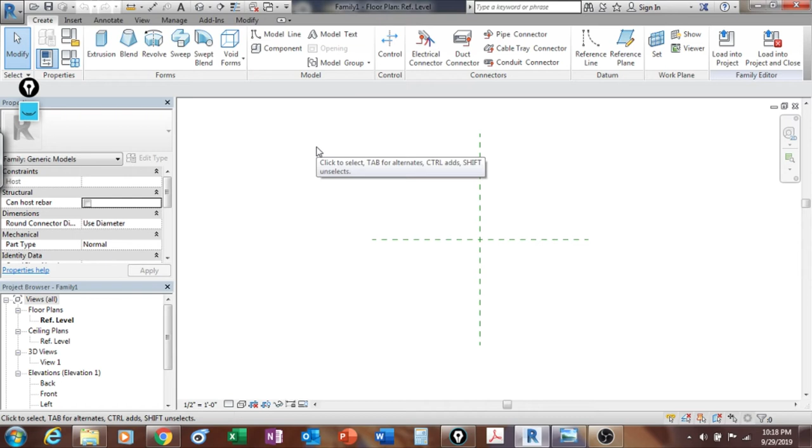Right here, open, I'm on the floor plan, and once I'm here, I'm going to create the reference line that I need. So first of all, change this to millimeters, so we work in millimeters. Here, and then I'm going to create a reference of 300 for back and forth.

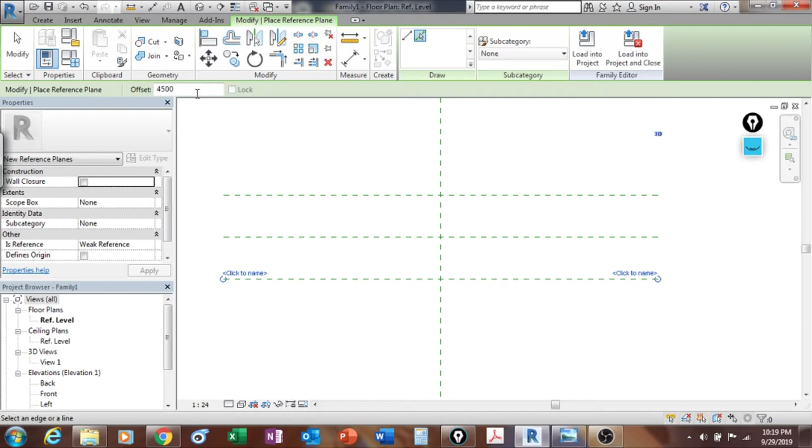Pick a line there. So this is also going to be, this we say is 900, right? So let's make this 400... 450, sorry. There, back and forth.

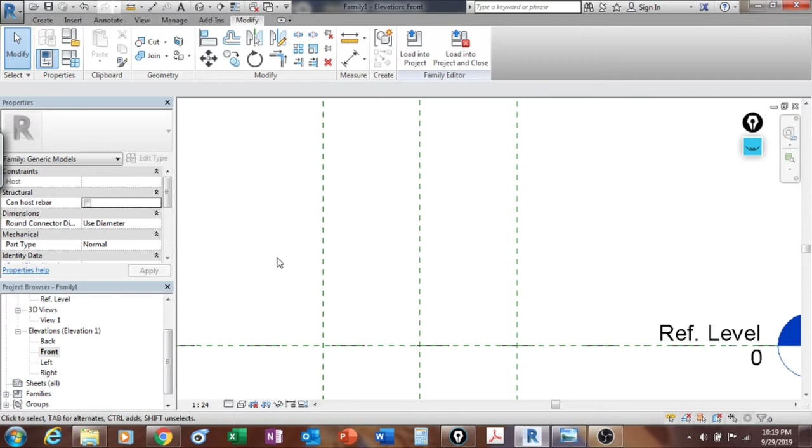Let's go to the front, and I'm going to make this 100 from the floor. There's two ways you can do this. You can put your family right here on the floor, or you can leave the 100. Now you have to have in mind, if you offset this 10, 100 millimeters, every time you bring this into your project, it will go 100 above the floor, and I think that's what we want right here.

This is always going to be this leg. We're gonna make it 100, and they're always going to be 100. This piece always gonna take legs. Okay.

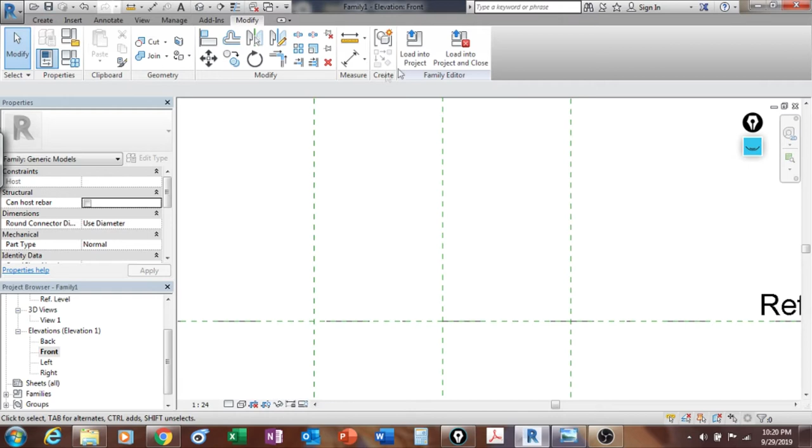So I'm going to offset this 100, so my box starts right at 100. So then when I compose my pieces, I don't have to bring it and shift it 100. Okay, so I'm gonna try to save some time in here. So right away, I'm going to create a reference plane. You can add an offset to it of 100. I'm gonna pick a line in here, and that's it.

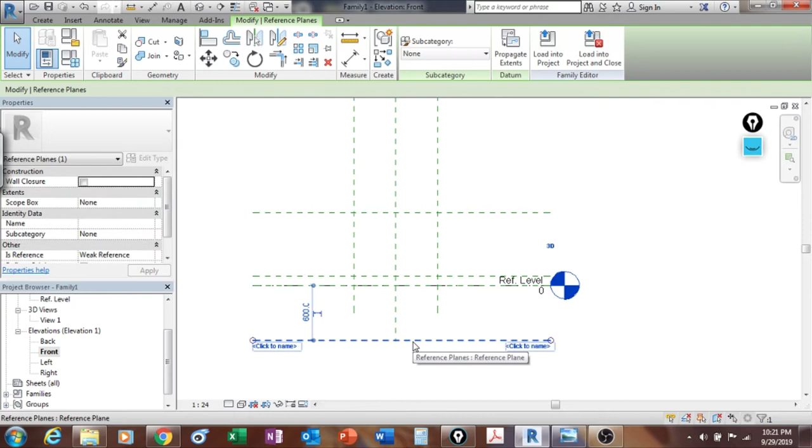And then the height is going to be 700. Pick a line again, and then that. This one actually not needed. You can put a name to it also.

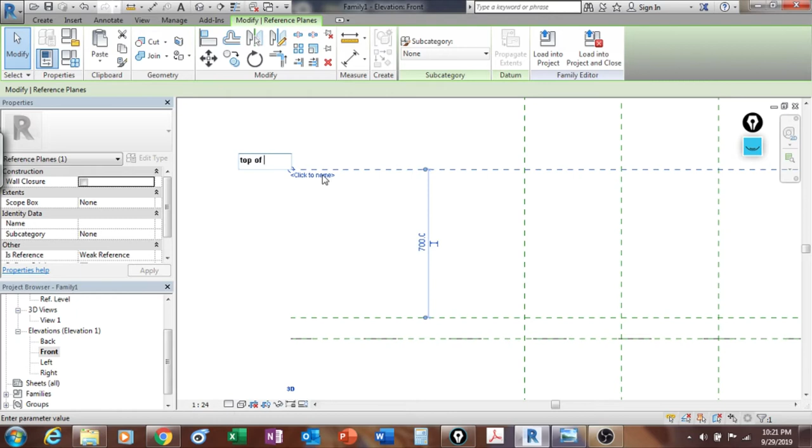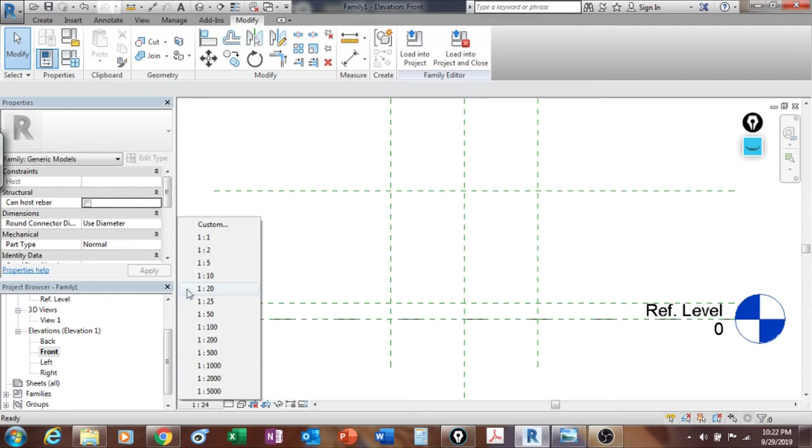This is kind of useful because in the future, if you're working, collaborating with other people, and somebody else needs to work on your families, they are not so lost when you get into the file, right? If you name things properly, you're gonna make it easy on the people that collaborate with you. You have to send this file to somebody else, they don't have to start guessing what is what, right? Even to yourself, sometimes you develop a family, and then a couple of months pass by, and then you go back to it and you start, oh, what is this? What is this for? What is this? You don't remember what it is, and you start trying to guess. So as much as possible, try to name things properly, so things go smoothly for yourself and for the people that collaborate with you. A Revit file might contain a lot of information, right? Sometimes it can be a little bit confusing, picking up some other people's files.

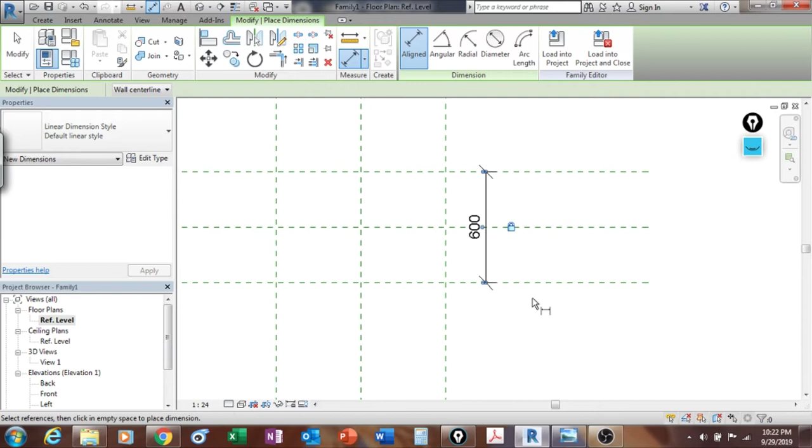Okay, so that's everything that I need in terms of the reference planes. Go back in here, I'm going to start creating my parameters. Now, the depth is not going to be a parameter. Click here, this is 600, and I'm going to lock this one because I don't want this to be anything else other than 600. That's that. Let's go to the front and do the same here.

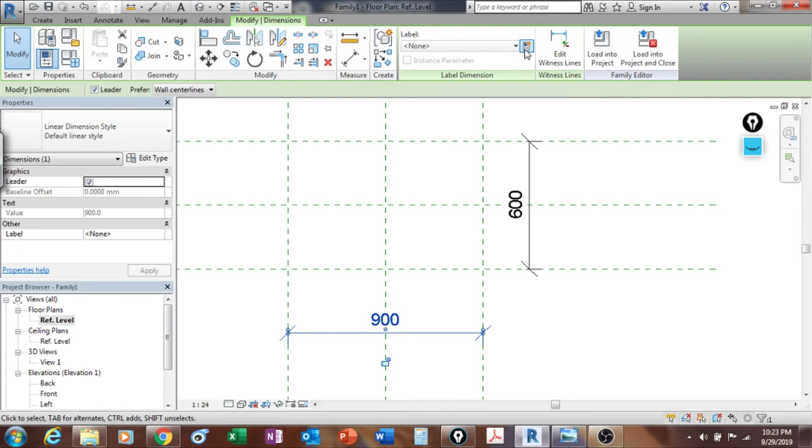This I want it to be, no matter what, 100. And this also I want it to be 700 no matter what. Okay, let's create this parameter right here, the one that is going to control the width. So create, it's 900.

Create parameter right here, label, not create parameter. It's a family parameter. It's going to be a type parameter because basically I'm going to have 3 or 4 types of width, right? That's why I'm going to have 900, maybe 600, maybe 450, maybe 1000. So it's going to be a type parameter because they're going to have fixed types, maybe 3 or 4. Name, I can call it width.

Going to be a little bit more specific since this is going to be a composition at the end of the day.

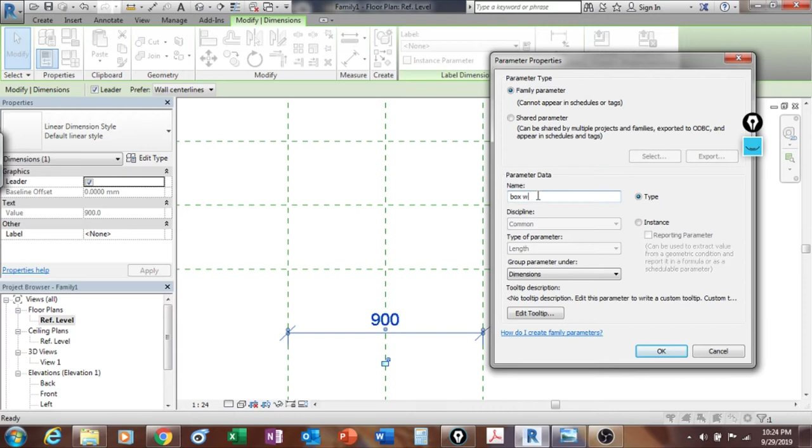As I mentioned earlier, it's very important for you to actually test everything, right? So I'm going to test this parameter and see if it works properly.

Okay, we have a problem here. Now the problem we have, and this is why you need to test everything, is that this went from 900 to 1500, but it did it in a way—it just grew in this direction only. Notice that it goes out of center. So even though it went to 1500, it didn't go just the way I wanted.

The way I wanted this to happen is for my family to grow in both directions, right? So for that, what I'm going to have to do is add something new here. I'm going to have to add what we call a constraint.

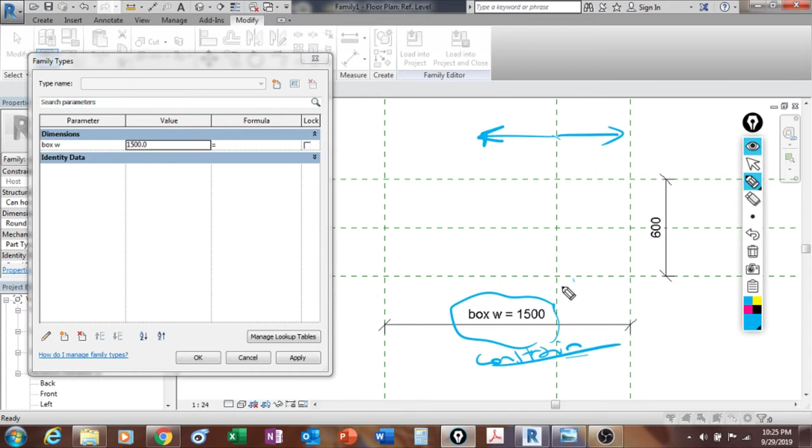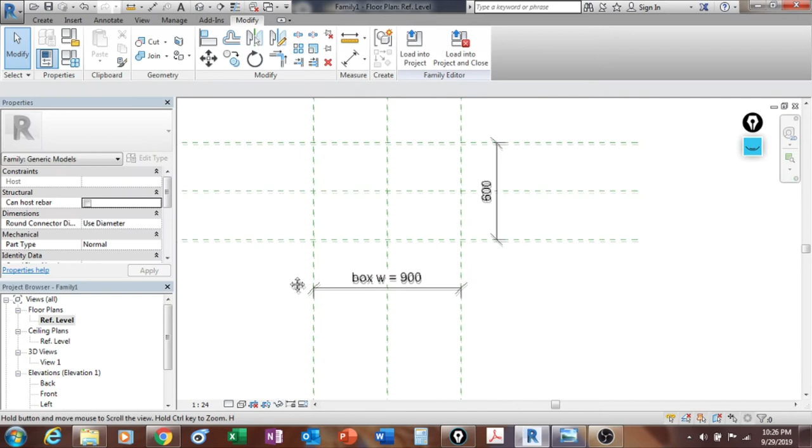Okay, so the constraint is going to be this: equal and equal. So my parameter is going to be constrained. Let's go here, 900, hit apply, go back to the center. So what we're going to do now is add constraints to the parameters.

Now one thing you have to remember, this is very important: you cannot add the constraint first and then the parameters, because it won't work. The way this works is that you first create a parameter and then constrain the parameter. The order is critical here, otherwise, believe me, it's not going to work. So let's add a constraint.

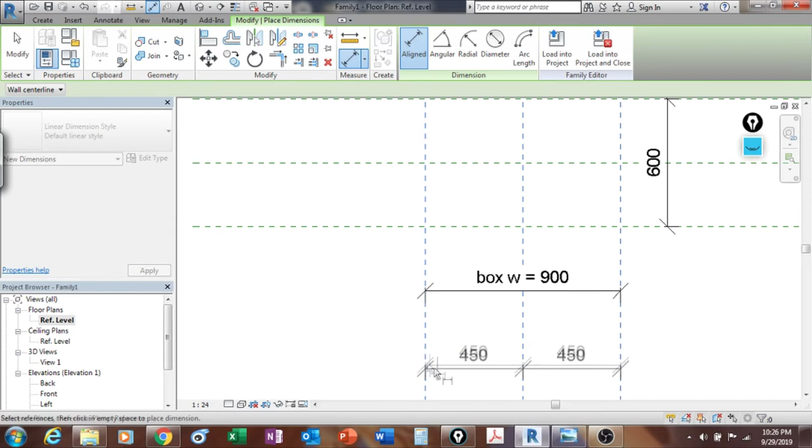It's quite simple. You make this dimension and then make it equal. So now this box width is constrained right here to be equal on both sides. No matter what happens to this dimension, it will grow equally to both sides.

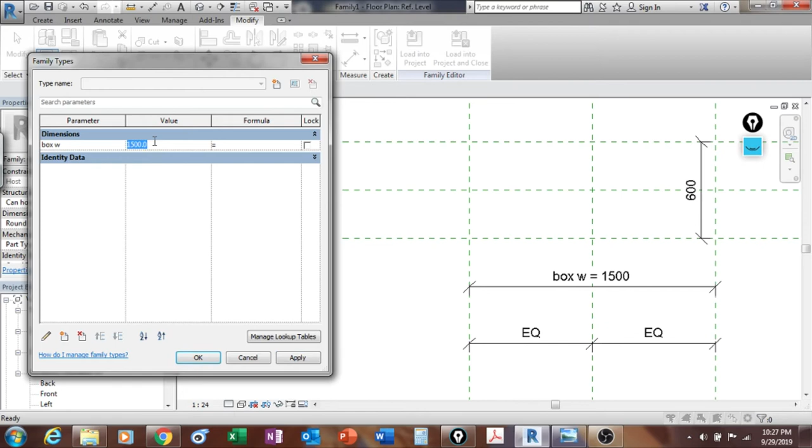But you don't have to believe me—let's try it. I cannot stress enough how important it is to test every single thing. So, apply, and just as we anticipated, it went both ways. Right now the width is 1500, and it's 750 and 750 on each side. So we're ready to continue. I cannot stress again enough the importance of testing everything you do.

Okay, so I think we don't need anything else for this box. Now we can proceed with the geometry. So let's go for it. I'm going to start from the top. I'm going to start from the front.

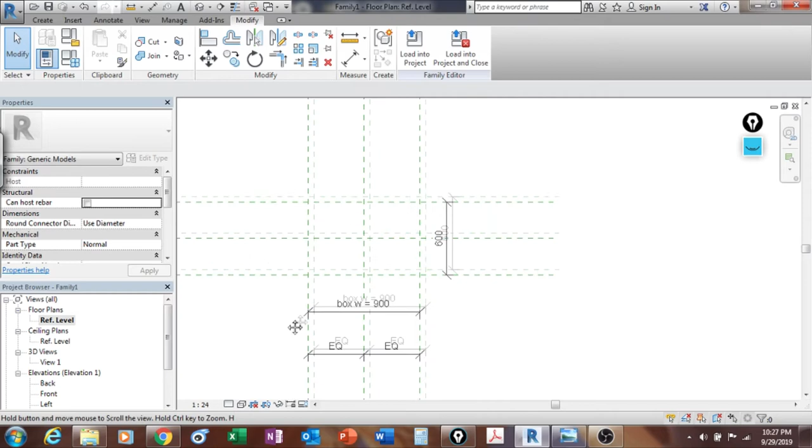Trying to see the best way to do this. I think I'm going to use... yes, I'm going to need some more reference planes.

Okay, so let's talk about the width of this thing. Let's make this 2 centimeters, right—20. So let me go here and create more references, and I'm going to make this 20.

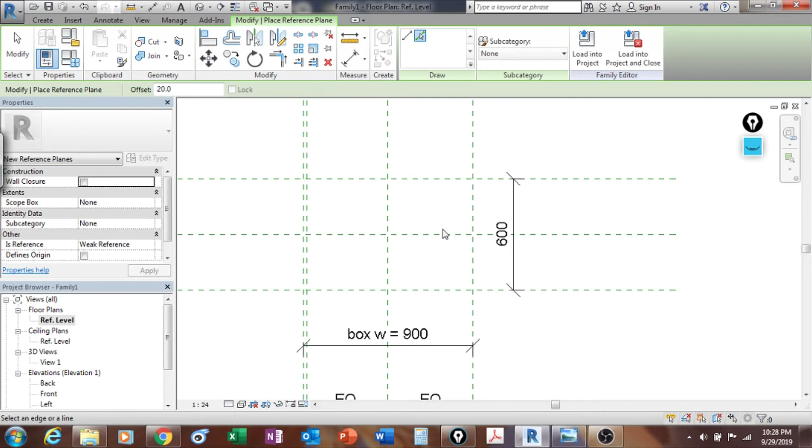Pick a line, I'm going to pick this, and I'm going to pick this, and I'm going to pick the back also. I'm going to pick the front. Yeah, so the offset there is 20, so it's set.

Now for this I need parameters—actually, I don't really need parameters, because this distance is always going to be 20 no matter what happens to my box. I want this to be 20, so it doesn't need to be a parameter, it doesn't need to be something I can change. So it's going to be enough to create a dimension here and lock the dimension.

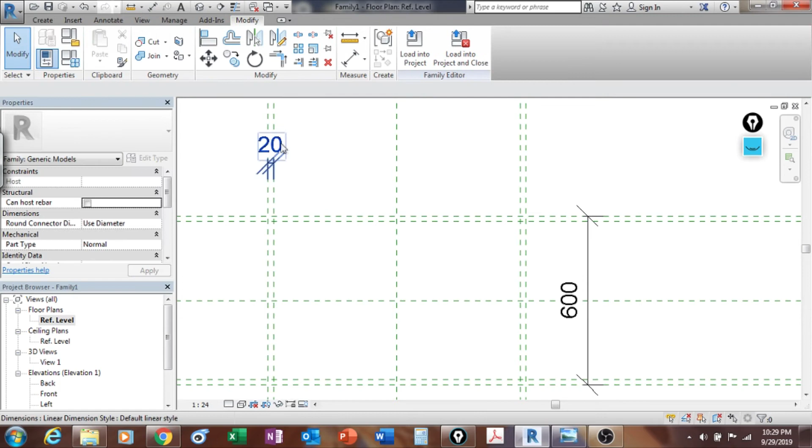You can move it outside. If you pick it from here, there's a little point, and you can move it outside. So now this dimension is locked, meaning it's not going to go anywhere. Pick there, lock this thing, and I'll take this outside.

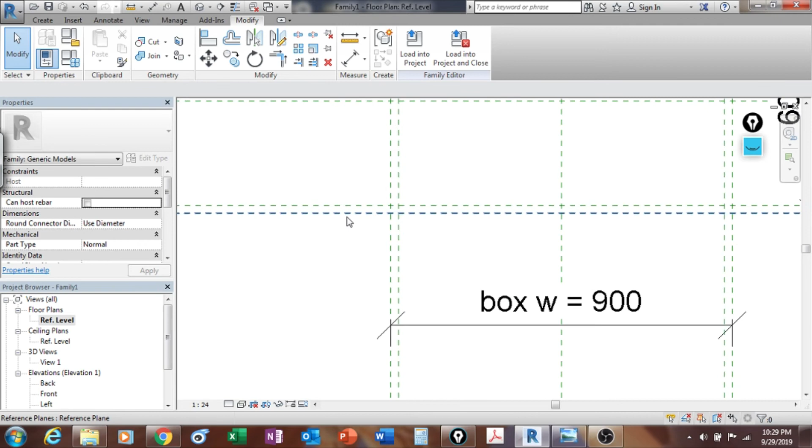Okay, so I'm going to do the same thing here—give it a 20, make sure it is locked, and move it outside. So I need one more here, right? Isn't it—20.

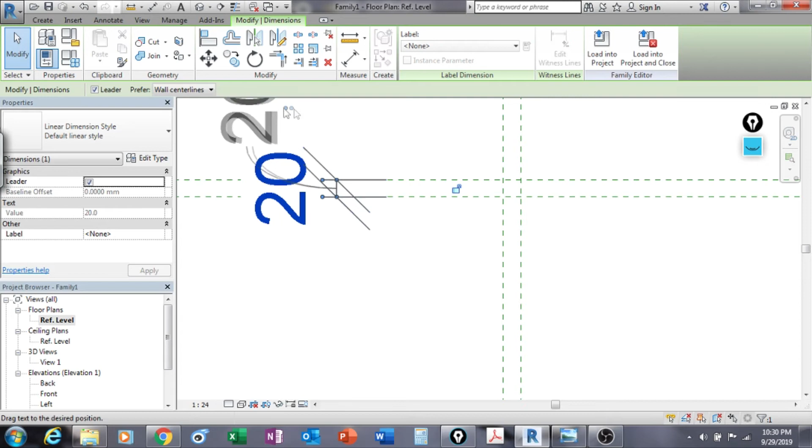So you can check always that your dimension is locked. Okay, one thing I want to do now is test this. Go to 1500 again and see if this parallel line goes along. Let's see, hit apply... yeah, so you can see they go along and they keep the distance of 20. So that's nice.

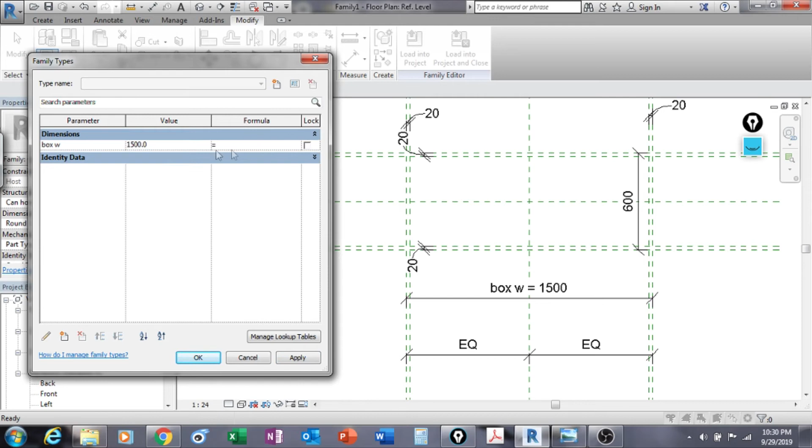Okay, I know this is tedious, maybe a little bit time consuming, but it's the best way to ensure yourself you're only gonna do this one time. Test every single thing you do. You take a step, you test it, and if it works, you continue developing your piece.

So I guess we are now ready to start working with the geometry. I think I'm gonna start with a big box right here. You need 2 holes in here, so I need to see what is the best way to do this, because I need this back not to be... okay, so yes, I'm gonna have to create 2 voids for this. I'm going to do a box and then a void from the top and a void from the front. I think that's a safer way to do this. So let's do it — here, create an extrusion.

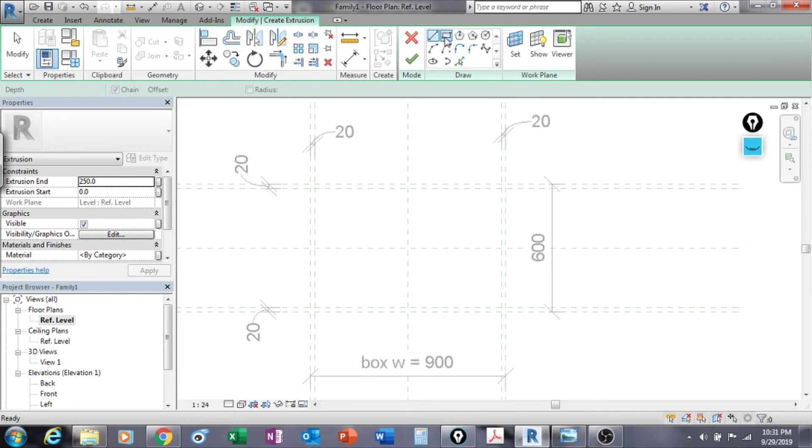Yeah, I want extrusion, we're gonna do a box. Make sure this is locking here, and locking here. So let's go to the front view and see what we did. Okay, take this in here, lock, and take this to the top, and lock this. Okay, yeah, not very exciting.

On the front, I'm also gonna need the offset of 20. Now that I realize it, to create the actual hole in here. So we have this margin, and then I need one from the top and one from the bottom.

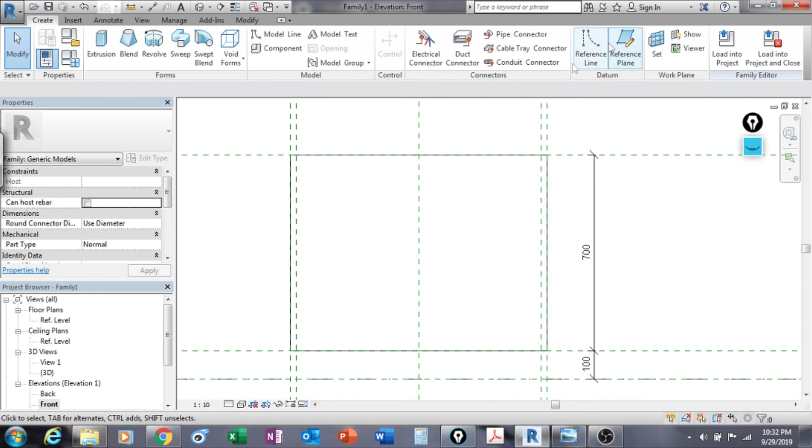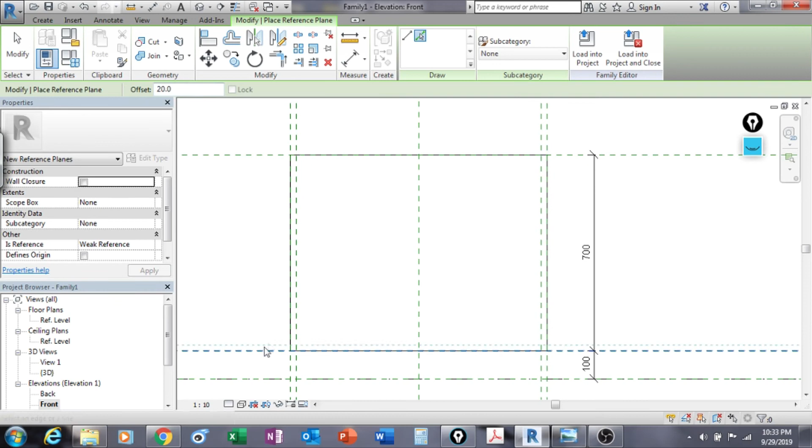So create — let's say 20 from the box. From the bottom, we can go a little bit. Let's make it 20, let's try 20 all around. 20, let me see. No, it's the same thing. Let's make it 20 all the way around. Okay, just for the sake of the conversation. So 20, 20, right. So I'm gonna lock these dimensions because again, this is gonna be all for me, 20, no matter what. That's that.

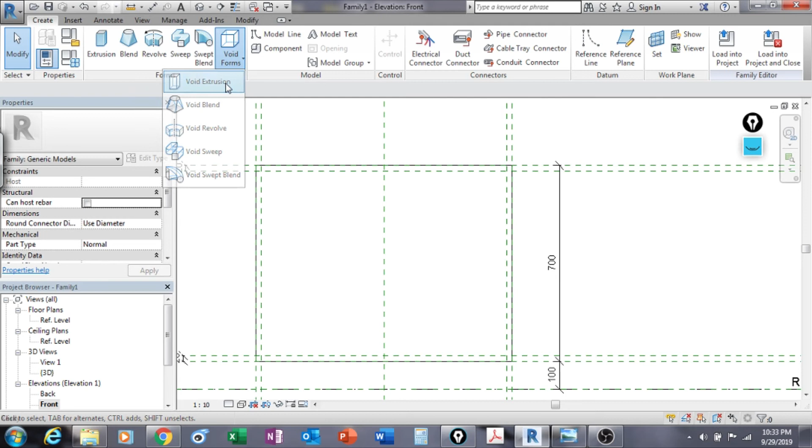So now I'm ready to create my void. First I'm going to create a void on the front. Create a void as a void extrusion — it's a rectangle. Let's put it here, and I'm going to lock everything around it. Put this lock, and then go into the top view.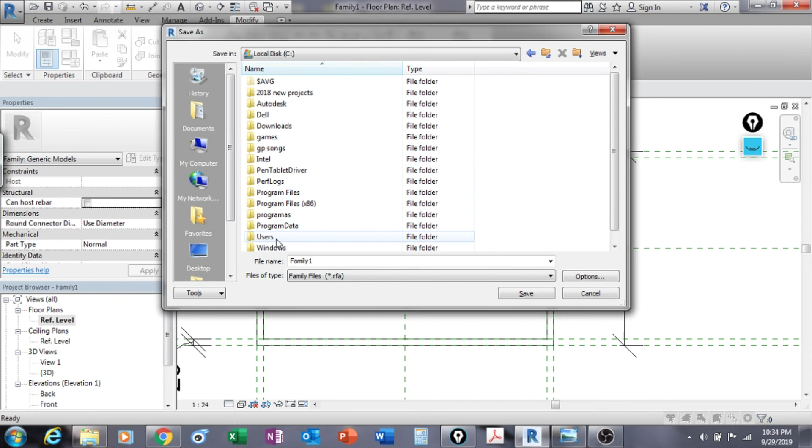And going to align here, lock, and here, and I want this thing... save. And the way I'm gonna save this is as a box, right? This is my folder, this is a Revit working folder — I'll call this box. Save it, so now save.

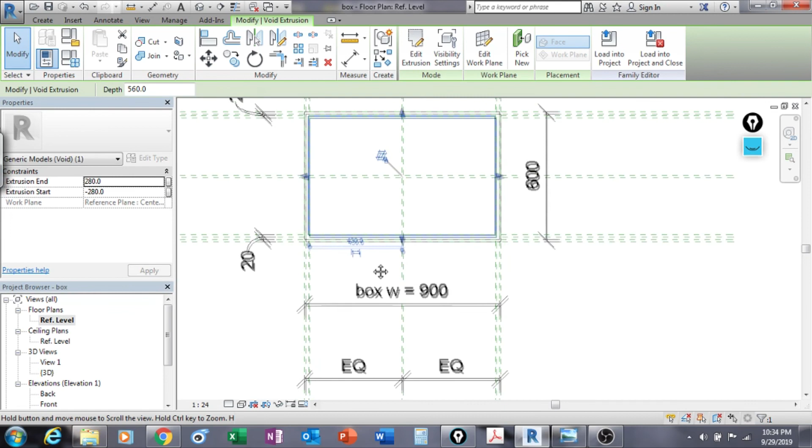Let's see what we got so far. Okay, so no hole so far. Let's see what's happened — let's go to the top view. Remove constraint. Okay, what's happened is this is my box, and I just created my void within my box, so that's why you don't see the hole.

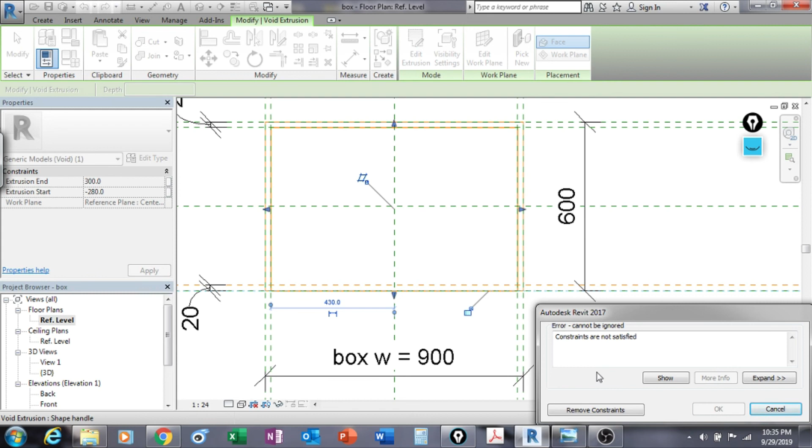So what I need to do is move this side of the void and align it to the front of the cabinet. If I try to do so, Revit is telling me that I cannot do that because this is constrained — that was the whole point of constraining this. And it gave me the option to remove the constraint. Yeah, that's what I wanted to do, remove the constraint.

And now I'm going to constrain again, so we use the align option right here. And if you go here, now we have our open cabinet. Escape always to go out from your... so we have the box.

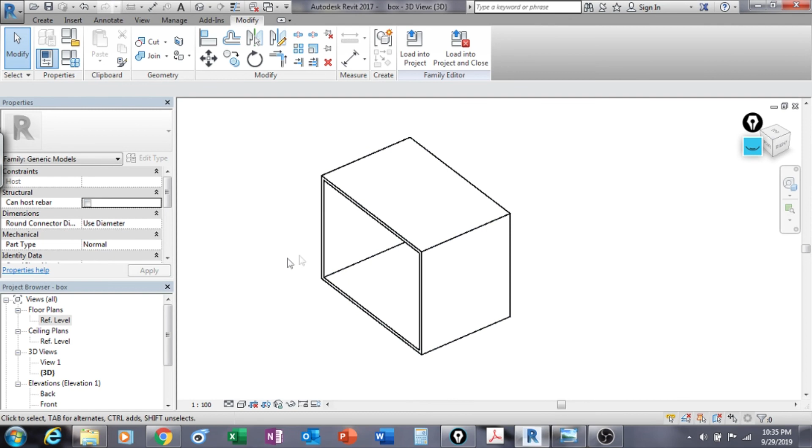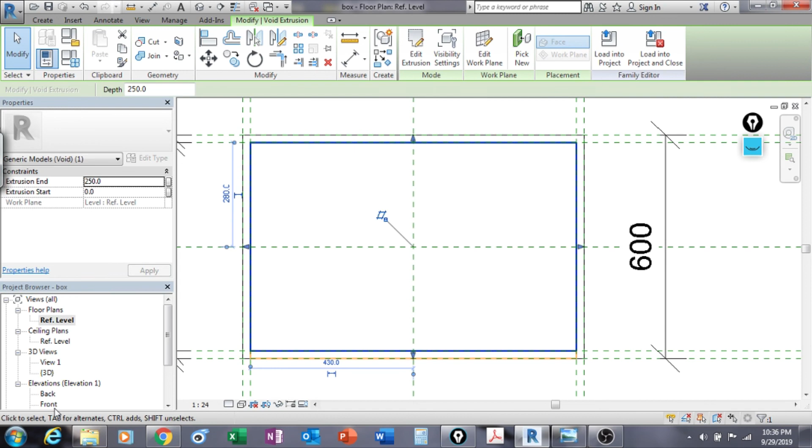Now we have to work on the top. Let's go to the top view and do pretty much the same, but this time, yes, again a void — extrusion void, a rectangle. Make sure it's locked here, here, here, and here. Okay, so you can apply the changes, go to the front, and take the void to the top. Align there, and then I can take this under this side and align there.